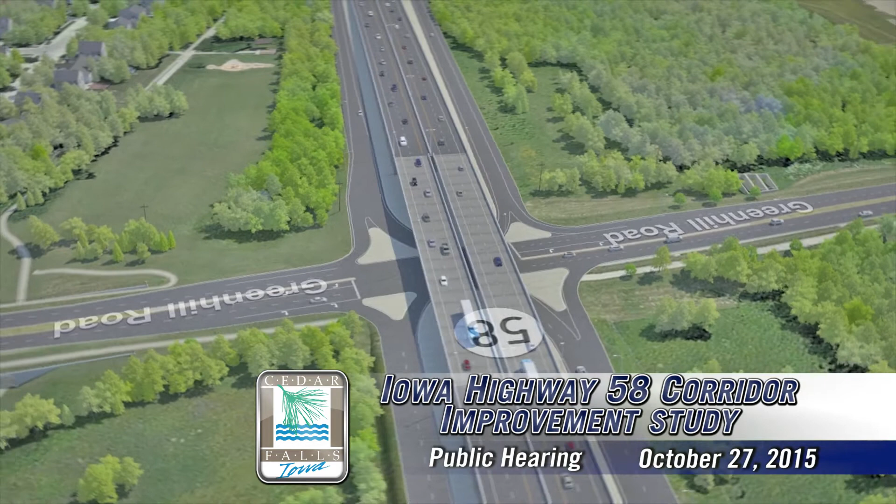In just a minute, Larry Wheely with AECOM is going to go through a formal presentation. He said 20 minutes, maybe 25, 30 minutes, depending on how long he wants to go. And then after that, we will take questions. So we'll hold off on questions and responses until then. And when you do come up, please keep your comments as close to 3 minutes as you can. We have a lot of people here tonight. Again, we appreciate you being here. And Larry, I'll turn it over to you.

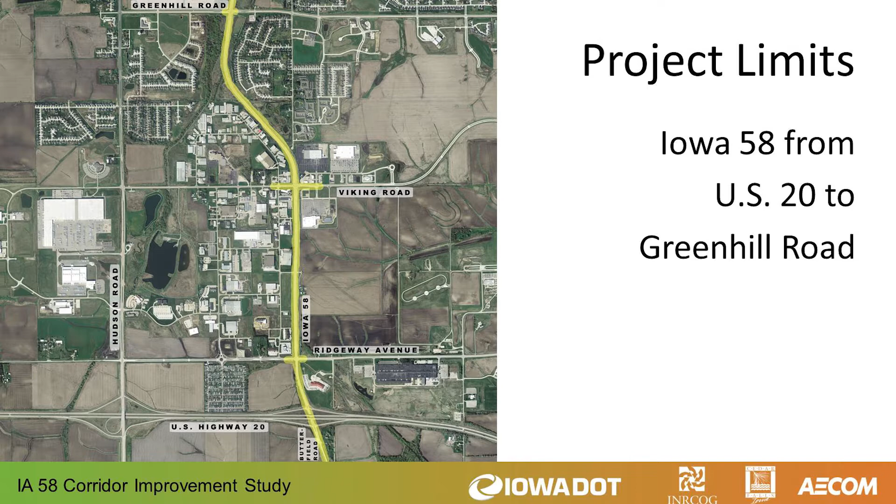Just for your information, the project limit is on Iowa 58 from US 20 up to Greenhill Road, and then just a little bit beyond Greenhill Road where the ramps tie back in to 58. The purpose and need statement is kind of the guiding factor that we look at when we're evaluating alternatives and making decisions on the project. We want to know that what we do meets the purpose and the need for the project. For this project, that purpose is to increase the safety for vehicles, pedestrians, and bicyclists, to improve the flow of traffic, and to provide adequate capacity to accommodate future traffic growth in the corridor. So that statement is what the alternatives were evaluated against to make sure that we met those criteria.

We talk about the need for action. I think we're all aware of the safety issues that are out there on Iowa 58. This study, which has been going on for about 2 years now, looked at accidents between 2008 and 2012. In that time frame, there were 168 crashes, 35 injuries, and unfortunately 2 fatalities. And we know that outside of that 5-year window, there have been, I think, 3 other fatalities in the corridor. So we know it's a dangerous area. That crash rate is about 40% higher than the statewide average for that type of area.

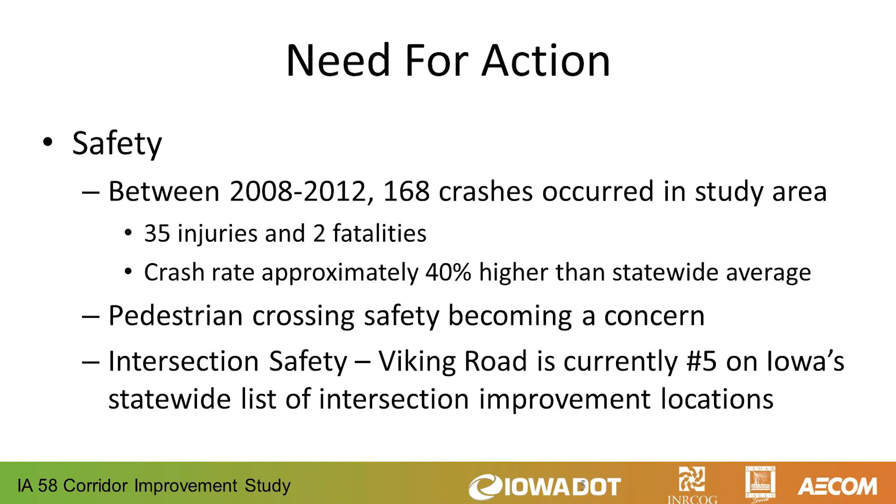Pedestrian crossing is definitely becoming a concern. You've got restaurants on one side of the highway and hotels on the other side. That's a concern; we want to make sure that we can safely accommodate pedestrians. And just as a matter of information, the DOT classifies intersections, and Viking Road is the 5th most dangerous in the state according to their criteria. So it's something that is definitely in need of changes.

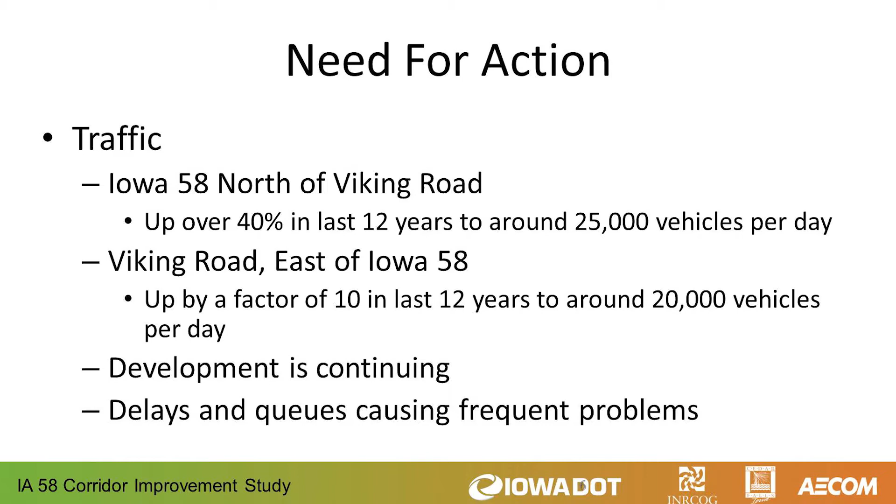Traffic on 58, we know it's increasing quite a bit, 40% in the last 12 years. Viking Road east of 58, this is a number that is just really surprising. It's gone up by a factor of 10 in 12 years. And we all know why. We just had Blain's out there 12 or 15 years ago, and now we've got Walmart, Target, Menards, McDonald's, the list goes on, and it's continuing to grow out there. And delays and queues at all of the intersections out there continue to be a problem.

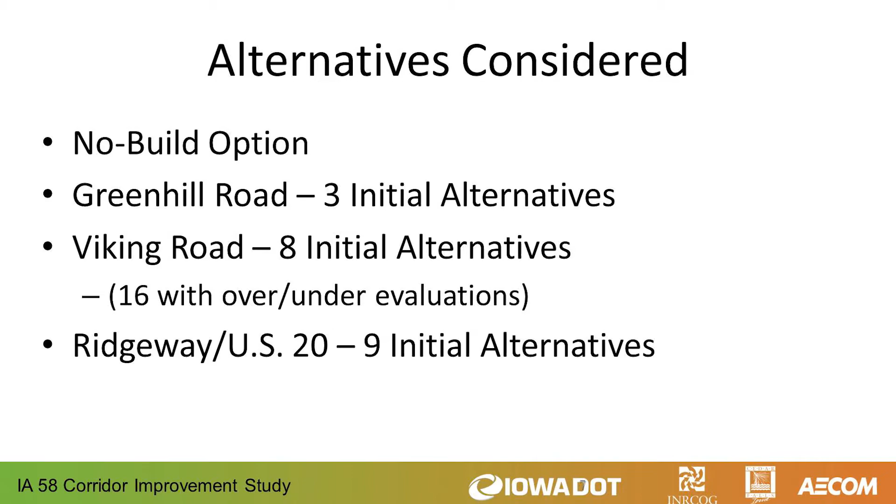We did look at many options in the corridor. First, we look at what happens if we don't do anything. That's one of the options that's considered. For the other intersections, we did look at a number of different options, and I've just kind of thrown them up there. I know you can't see them all.

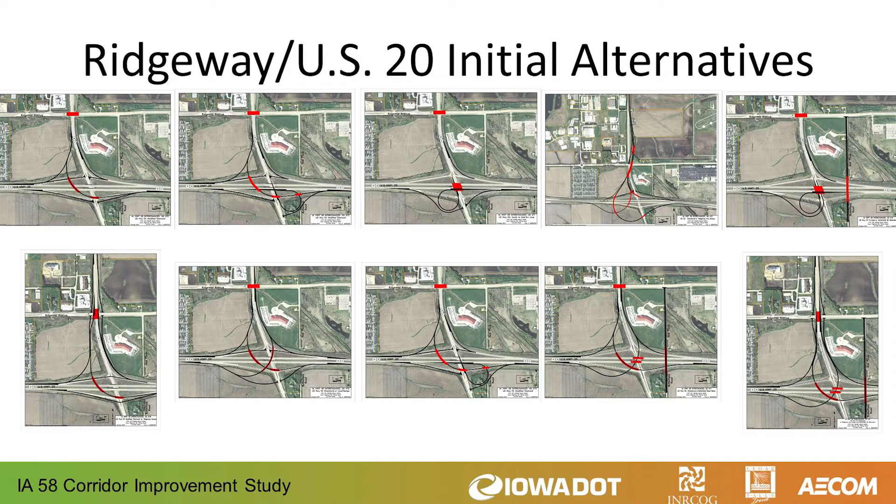We've looked at different interchange configurations at 20. Some of these had Ridgeway connected, some of them did not. Some of them relocated Butterfield Road, some of them did not. We looked at many different options in that area.

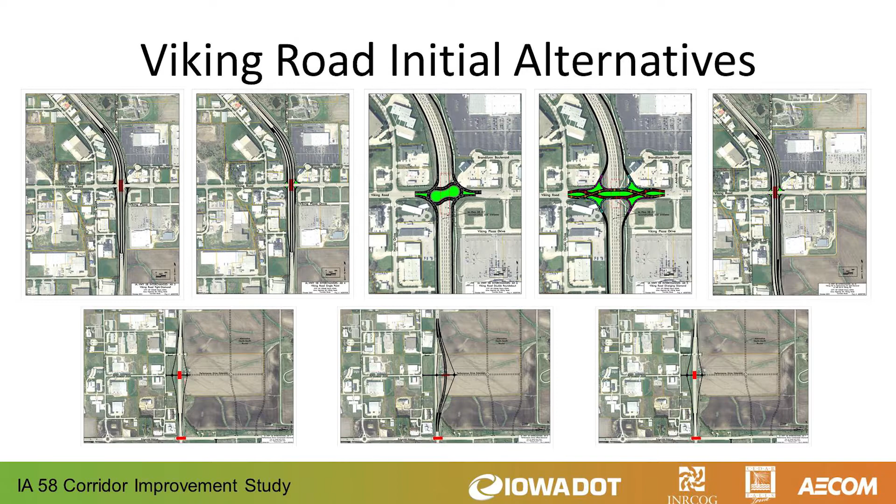At Viking Road, we did look at 4 or 5 different interchange types there. We looked at moving the interchange south towards Shawnee rather than having it at Viking Road, just to see if combining Ridgeway Avenue and the Viking Road interchange in one location would work. Looked at many different things in that area.

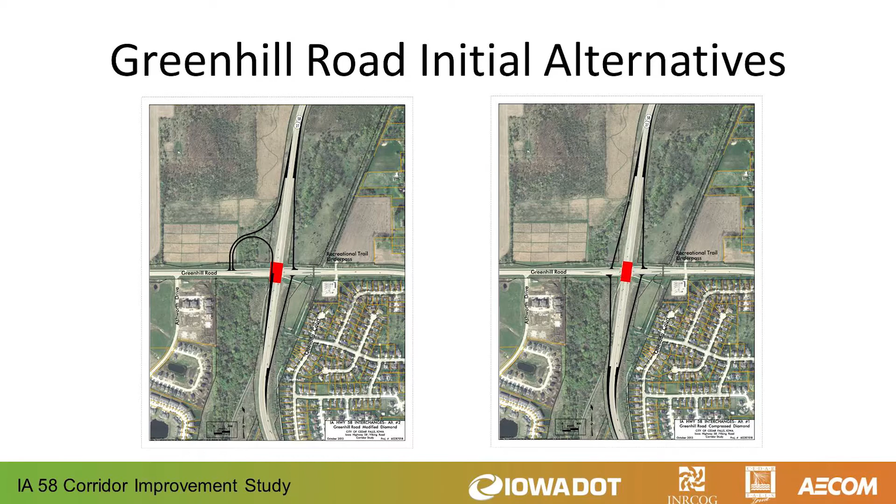At Greenhill Road, we're a little more constrained because of the wetlands and because of the detention basin. Looked at two basic options there, one with a loop and one without a loop in that location.

To look at those preferred alternatives, we kind of went through an initial screening process. We looked at traffic operations, which would work better, environmental impacts. If there was one that impacted more environmentally than the other, then we took the one forward that had the least impact. How much property was needed for the project, and then costs came into play. Some of the options are obviously going to have different costs. Took all of those to come to where we had a preferred alternative. And we'll go through these preferred alternatives now.

The system interchange at US 20 and Ridgeway, a system interchange would be similar to what happens at 380 and 20 over in Waterloo, where the through traffic doesn't need to stop at any of the movements. Butterfield Road remains connected, and then Ridgeway Avenue also remains connected. That was one of the things that we heard very clearly at our last public meeting and in meetings with landowners and businesses in the area, that connection to Ridgeway was an important thing.

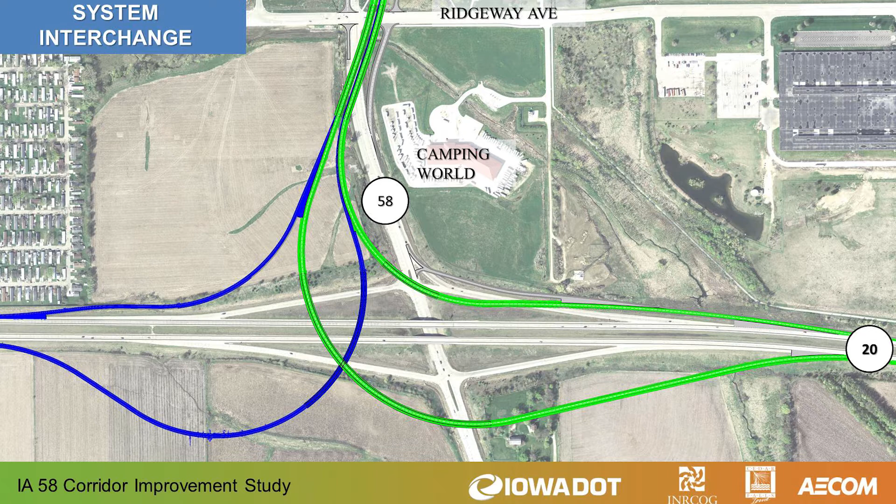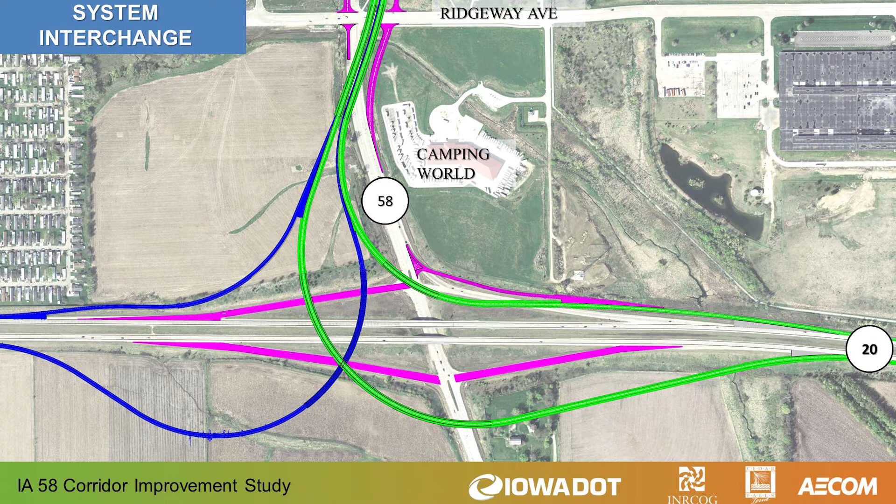I've got just here a graphic that kind of shows that, looking straight down on it in a plan view. The lines in green would show how traffic from 20 to the east would access Iowa 58. They would go over the existing roadway there to tie into 58 going to the north. The blue lines represent traffic from the west or to the west, proceeding to access Iowa 58. And then the purple lines here show that to get to Butterfield Road or Ridgeway Avenue, you essentially use the ramps that are there now to get to the existing 58, which allows you to reach Ridgeway Avenue or Butterfield Road to the south, going down towards Hudson.

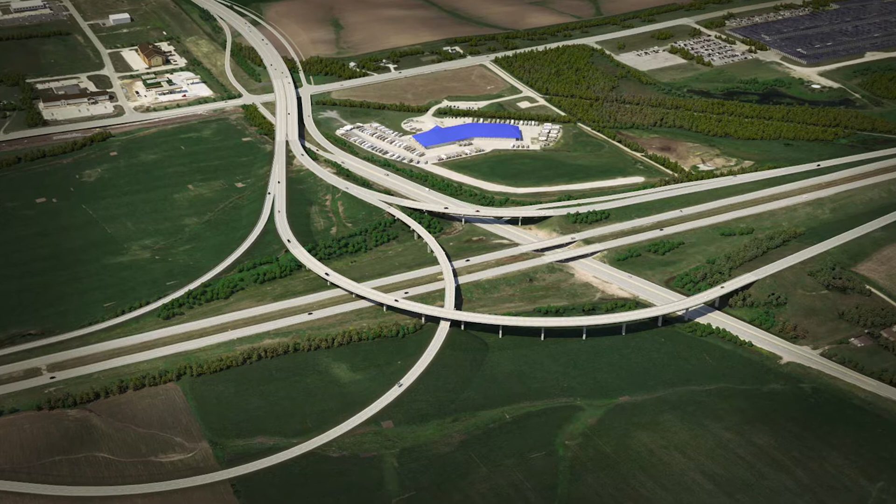This is an artistic rendition of what that might look like in the future. Just showing a large number of ramps on bridges, and how, in particular in this area, 58, rather than going straight to the north here, kind of swings a little bit to the east to allow the ramp connections to Ridgeway to stay there.

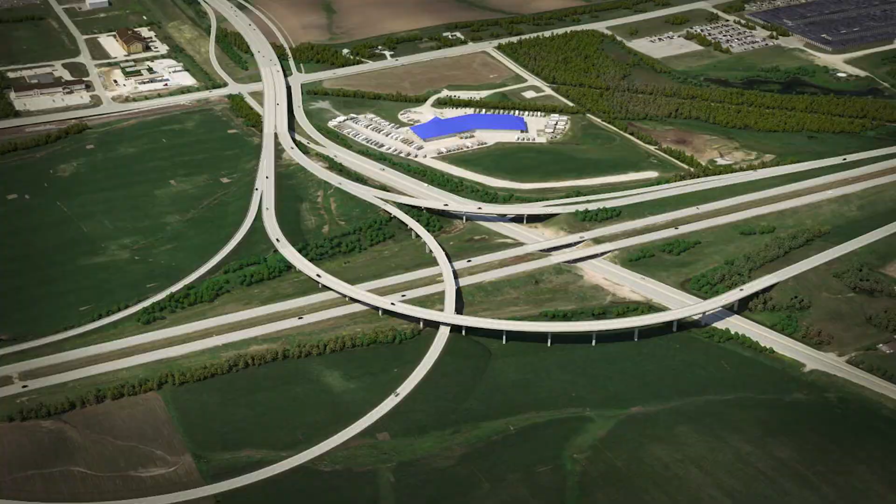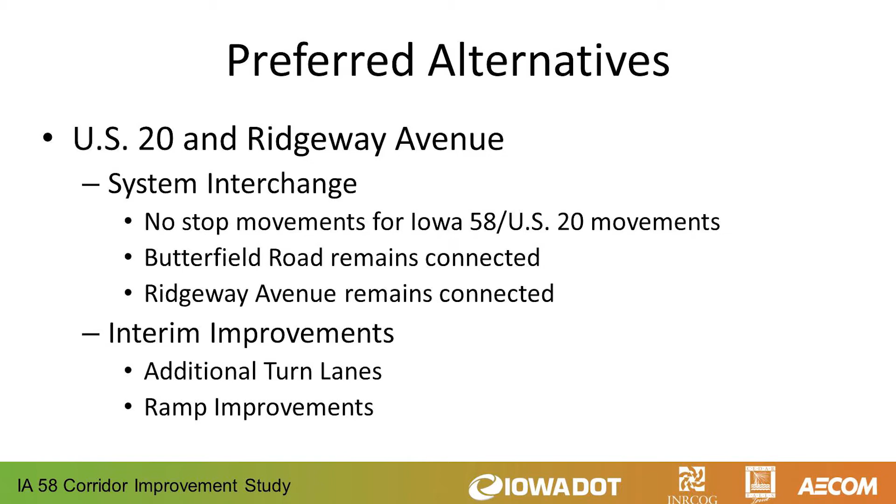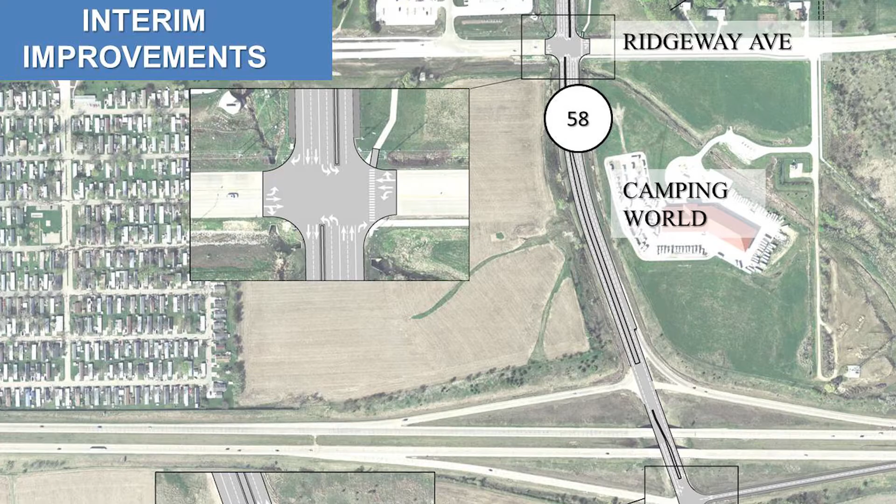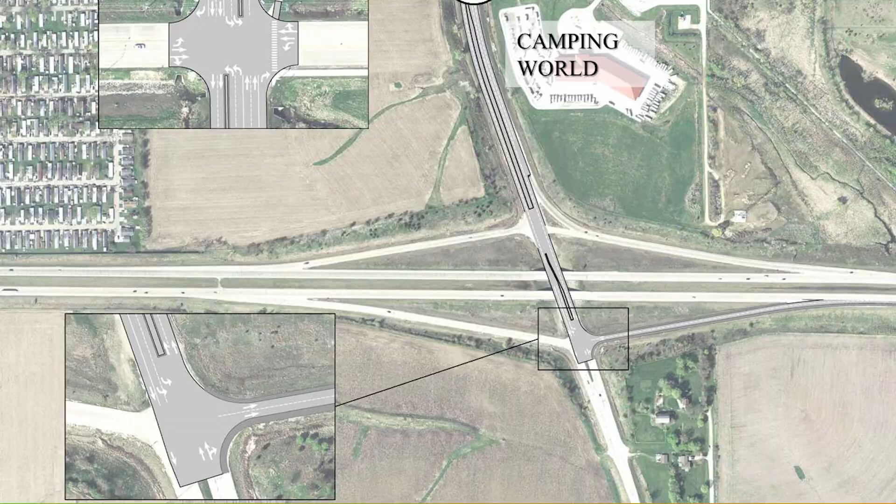Because we know that the system interchange is a long ways off from a funding standpoint and how the process goes, we did look at some interim improvements to the intersection, and those would include at the intersection of Ridgeway and 58, adding some double left turn lanes, and then at the ramp from the southbound 58 to eastbound 20, adding a double left turn there and a 2-lane ramp. And that bides time until we can make the full system interchange at that location.

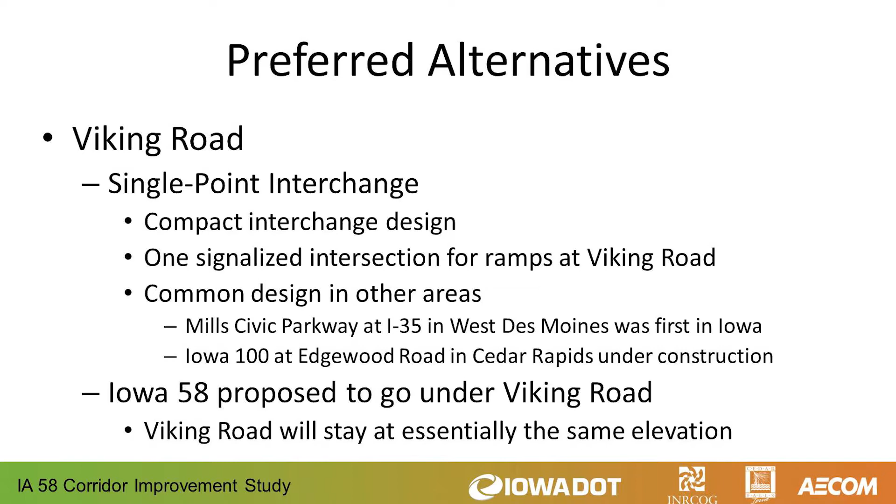At Viking Road, the single point interchange was selected as the preferred alternative. This is a very small, compact design. It basically takes one signalized intersection for the ramps. This is a common design. I know there's several in Minneapolis that are that style of interchange. In Iowa, I know that the Mills Civic Parkway at I-35 was the first in the state, and right now Cedar Rapids is building one at Iowa 100 and Edgewood Road. So it's not an unknown type of interchange. It's something that is known in the state and around the country.

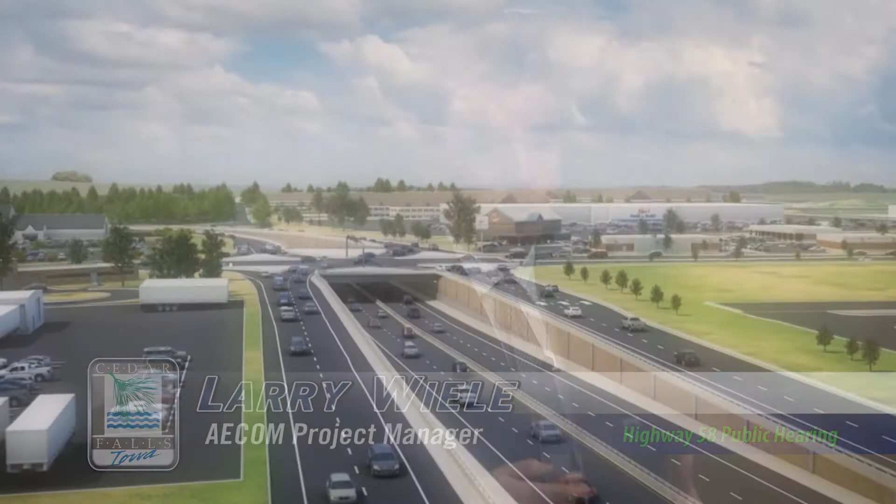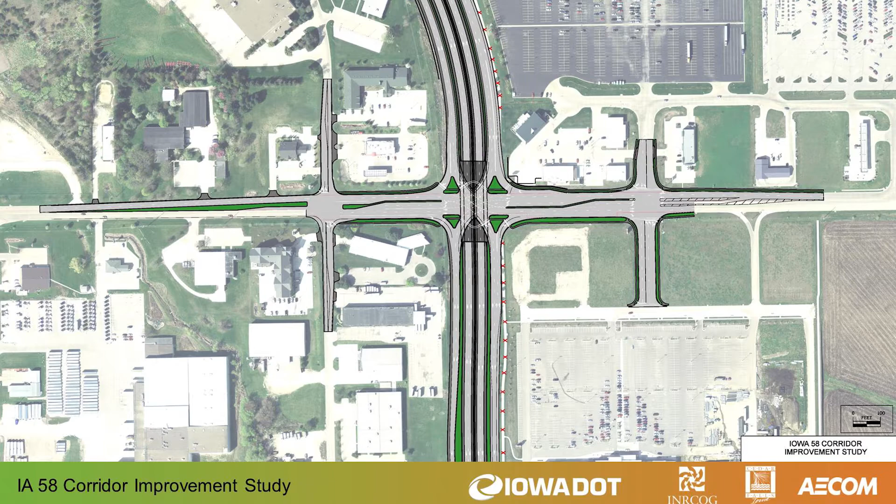Right now, one of the things that we've heard, again, loud and clear through our previous meetings, is that the preference was for Iowa 58 to go under Viking Road. From an aesthetic standpoint, people felt that was a better option. So Viking Road is essentially going to stay at its same elevation. This is just, again, an aerial view. This is 58 going to the north, Blain's, Walmart, and Target, showing the ramps that all meet at a single intersection right there at the center of the interchange.

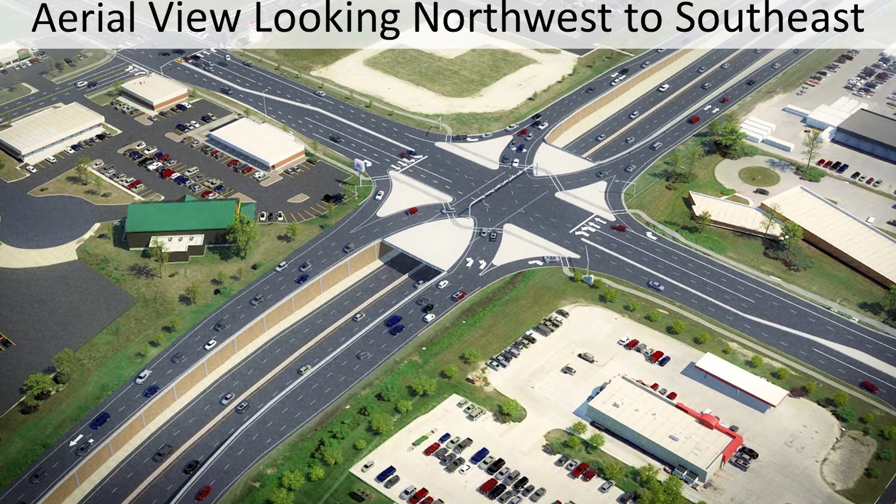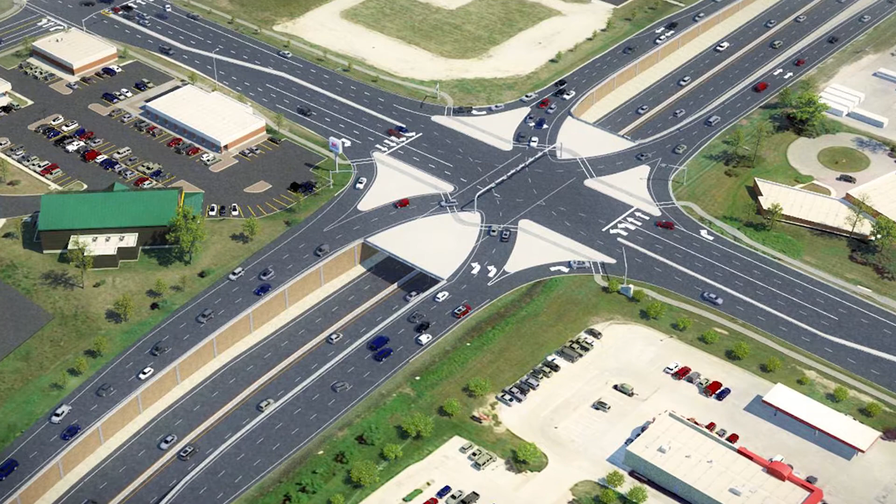This is a similar graphic that was in the paper last week. Probably most of you've seen it, showing how the traffic from the ramps would make a left turn at this one signalized intersection, and traffic from the south would make that same movement there. This is kind of a driver's eye view of how it would look if you were coming from Cedar Falls and heading to Target, heading to Walmart. This would be your vantage point there.

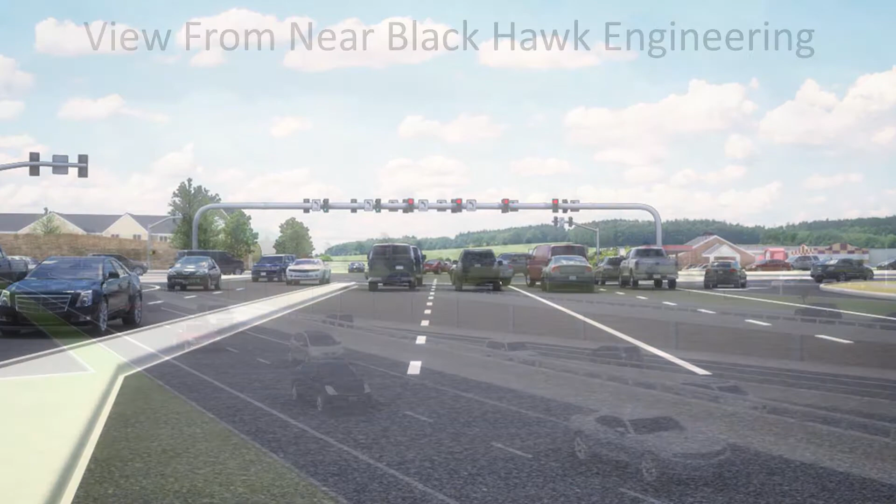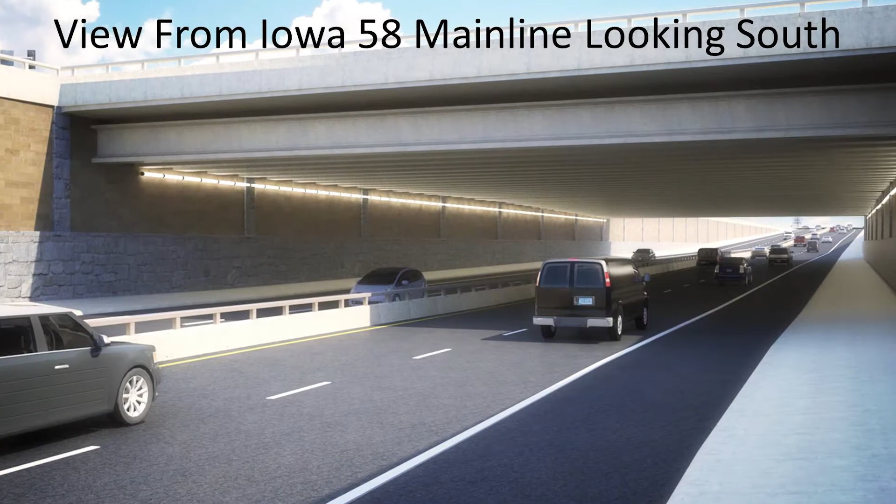This is just a view from near Black Hawk Engineering where you can see the roadway and how it dives down between two retaining walls to go under Viking Road. And this is just closer there where it goes underneath the Viking Road Bridge and takes the mainline traffic under there. This next video, this was running beforehand. I had several pictures and videos going beforehand.

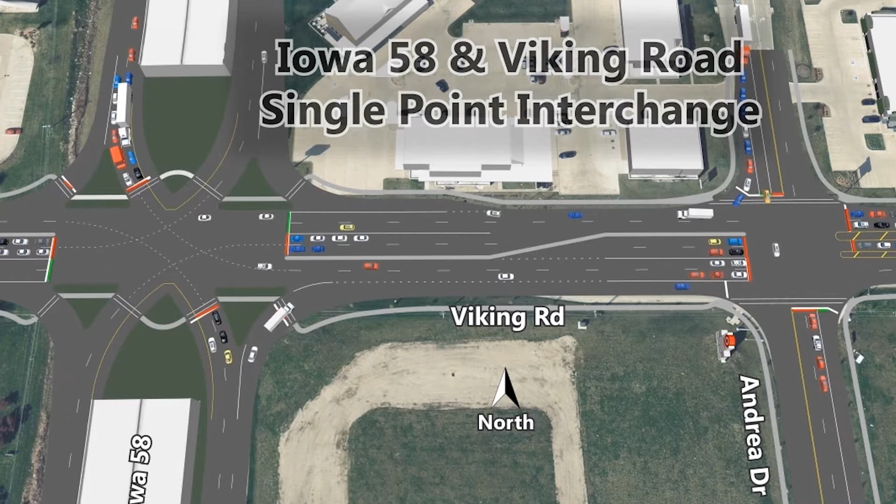This video just helps to show how the traffic operates at a single point interchange. This is the single point interchange here with Highway 58. And the first thing that will show up in the purple lines there is the left turns from Highway 58 from the ramps onto Viking Road. Those would be double left turns that would operate at the same time. The next movement that would happen then would be the left turns from Viking Road to get onto those ramps.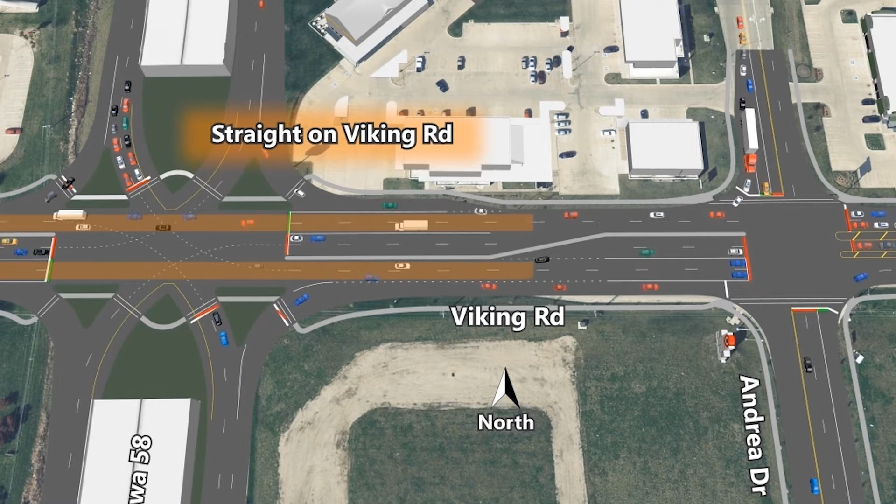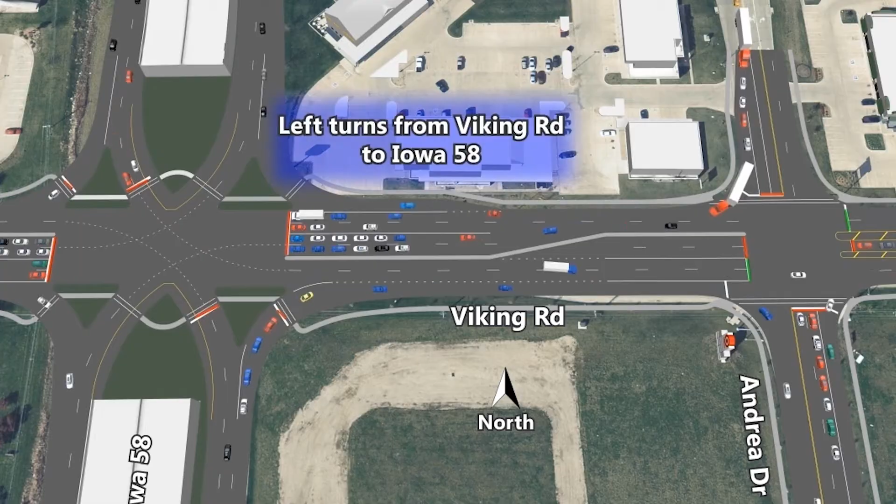And then the third part of that would be if you're going straight on Viking Road to go from the shopping to industrial park or vice versa going back. And I just point out that the hope is to interconnect the signals with Andrea so that the timing between the intersections works together and prevents a two-stop system, so that you can go through on green.

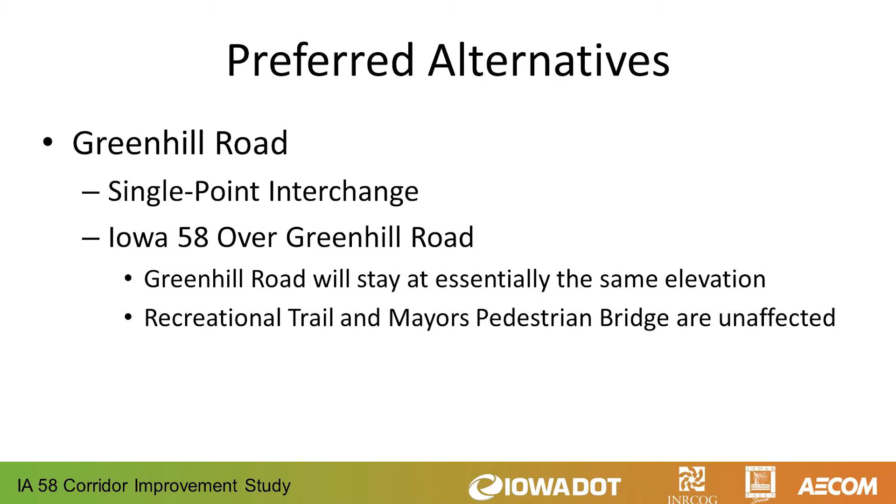At Greenhill Road, it would be, again, a single point interchange to try to compress the amount of land that's taken for that. It'd be similar to Viking Road, except that in this case, Iowa 58 would need to go over Greenhill Road. Greenhill would stay at essentially the same elevation. The main reason for that is because of the environmental constraints in the area. There's wetlands that would be more impacted by taking Iowa 58 under, which would essentially be Greenhill over, and there would be more retaining walls needed for it. So it's an environmental issue and a cost issue on that.

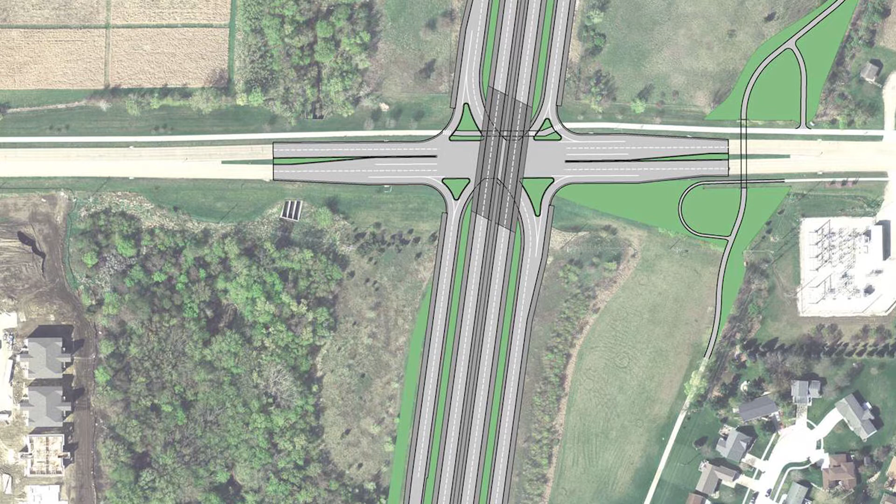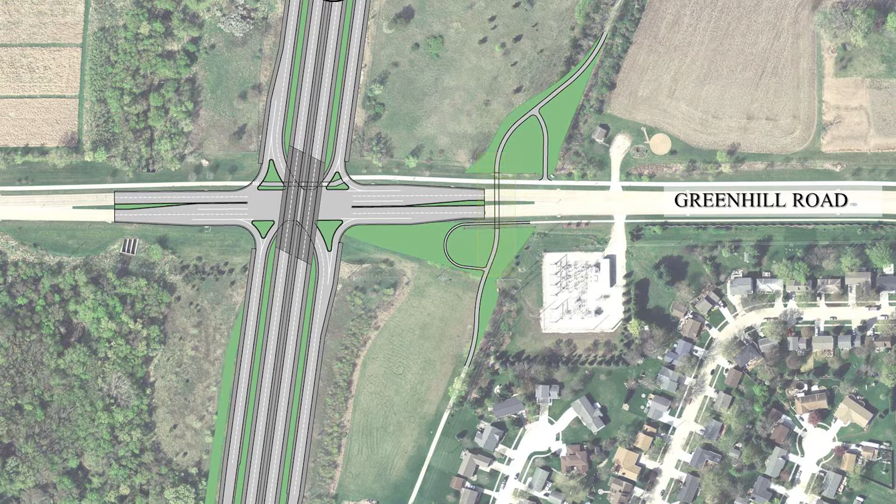And just a note there that the trail bridge and tunnel that was just constructed a few years ago would not be impacted by that design. And just to show you from the air again, this is the detention basin that we were talking about that we can't fill in. We're trying to minimize that impact, and that's also the area where some of the wetlands are. This is the tunnel under Greenhill, and this would be about the end of where Greenhill would need to be changed there.

Again, just an artistic rendition of that. The low area here by Dry Run Creek, the tunnel coming through here, and then showing the bridge going over Greenhill Road.

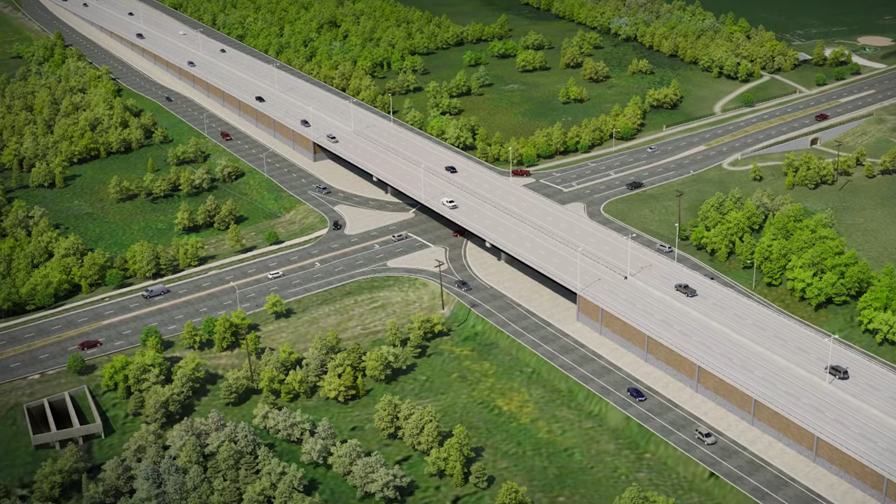As part of the environmental assessment, we take these preferred alternatives and we evaluate them based on a number of factors. Socioeconomic could include the land use, how it affects the parks and the recreational facilities, how much property is required, and then what happens during construction, and how does it affect emergency routes for police, fire, and ambulance. Cultural impacts could include historical, archaeological sites. That's something that we've studied. Your natural resources, the wetlands, how it affects floodplains, floodways, and then how much farmland does it impact.

Physical impacts would include noise and how much the noise is impacted by the project. And then visual impacts is, fairly obvious, how it looks to the public after construction. Just some key findings. I know the EA, we have copies here if you want to look at it, and it's been available online for you to review as well. These are just some of the key findings.

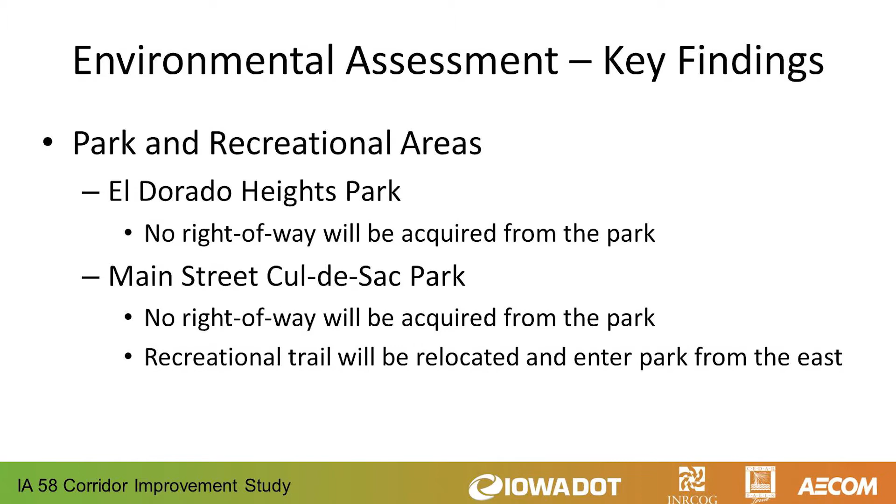For the park and recreational areas, El Dorado Heights Park, there's no need for any property to be acquired from the park. It stays essentially the same. At the end of South Main Street, that cul-de-sac is actually a park. It's got the shelter there. No right-of-way is needed from that park. However, the recreational trail there will be reconfigured to reconnect to the existing trail.

One of the main reasons for that relocation being needed is the desire to take the through recreational trail traffic and move it out of the interchange. It's a dangerous spot for pedestrians and recreational users, so we want to take as much of that, we'll call it through traffic, away from the interchange, and we've given them a route around the facility.

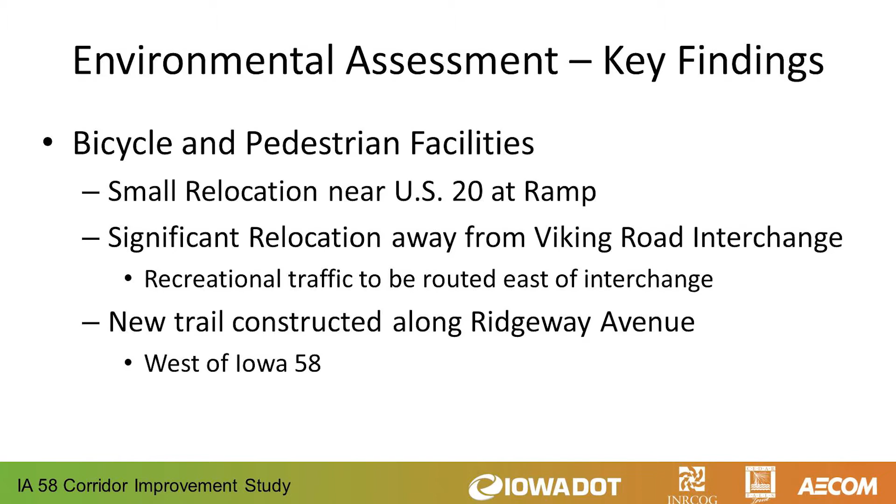There will also be a little bit of relocation near US 20 on the ramp, and then a new connection between Ridgeway and the existing trail along Nordic to connect over towards the Prairie Lakes area.

Right-of-way: one of the things that we've tried hard to do with this project is to not have any total acquisitions. We've been able to narrow down the right-of-way so that no buildings are impacted, and it's just a matter of taking some strip right-of-way along some of the properties, and where 58's been relocated, we've been able to do that in areas where buildings aren't affected.

We did find in our study that there was one historical site, the Butterfield Barn, which is the one you can see just south and east of the 20 and 58 intersection right now. And when we found out that that was an eligible barn, we were able to adjust the design to move away from that and

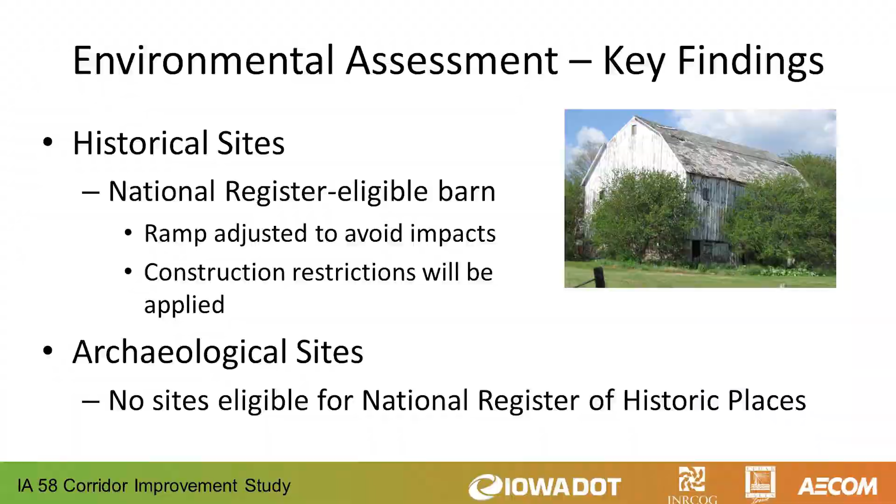not impact it directly. But even at that, the Historic Preservation Office put some restrictions on us that we would need to monitor during construction to make sure that no vibration and no damage occurred to the building. And there were no significant archaeological sites that were found during our study.

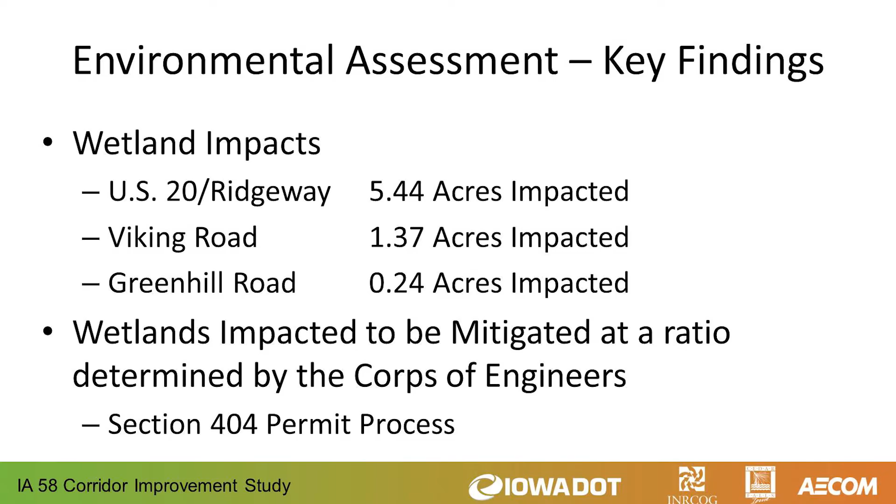Wetland impacts, we did find, as you see, there's some wetlands in the area. These are estimates based on our preliminary design. As we go through final design, we'll refine those numbers and then go through a permit process with the Corps of Engineers. They require us to mitigate any wetlands that are impacted, and those will be mitigated through that permitting process that we go through with the Corps of Engineers.

Noise impacts. The DOT noise policy says that noise abatement must be considered if traffic noise impacts are identified, and they have some criteria for that. It needs to be feasible, and they have in their policy that that's a 5 decibel noise reduction, that if you build a wall, you need to provide that 5 decibel reduction. And then it also needs to be reasonable. And that's $40,000 is what they consider reasonable for an individual property.

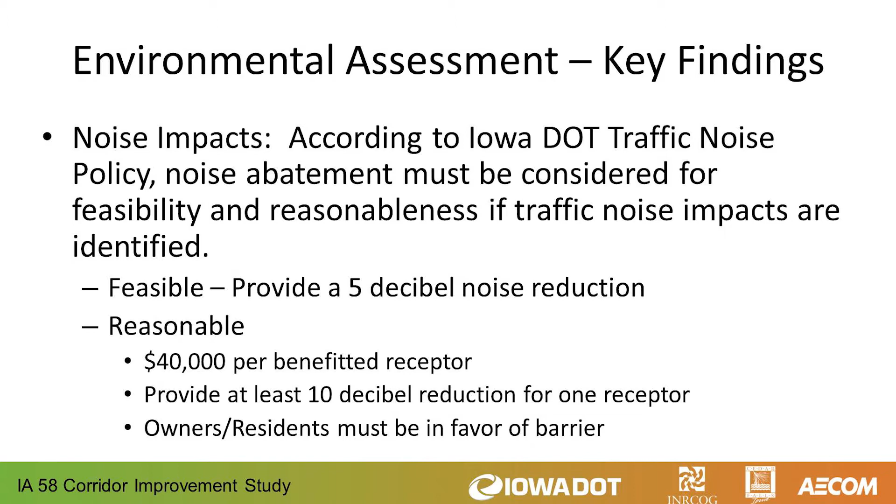And then it has to provide at least 10 decibels for one of those properties that is given that protection. And then also they need all the residents and neighbors to be in favor of that. There's pluses to the noise barrier. It reduces noise. There's negatives. It's a big wall maybe in your backyard, and some residents may be opposed to that.

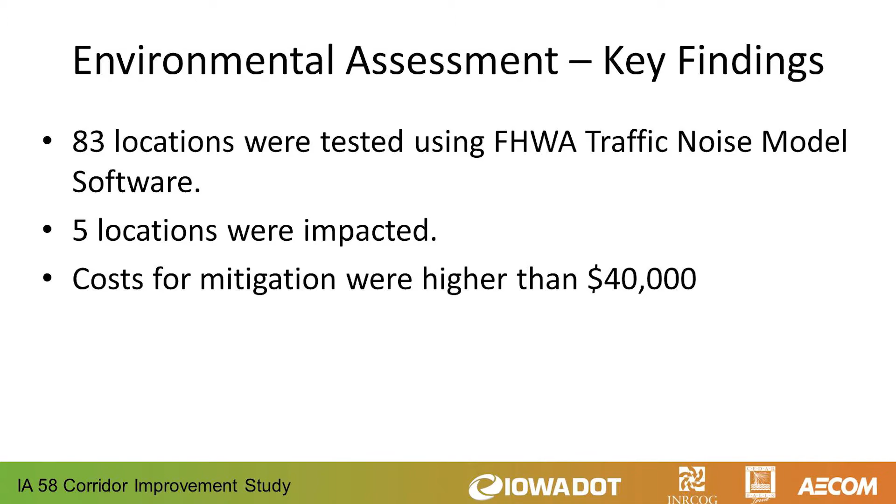In our study, we looked at 83 locations that we tested using the traffic noise model. That's the accepted method of doing that according to the Federal Highway Administration. We did find that 5 locations were impacted. However, we did find that the costs for mitigation were higher than that $40,000 threshold. So the noise abatement measures aren't eligible for the federal and state funding for that.

So we go through the study and come to the conclusion. We did find that the proposed project is necessary for safe and efficient travel within the corridor. Going back to that purpose and need statement, to improve the safety of the corridor and to allow for the traffic to move. We also found that there were no significant adverse social, economic, or environmental impacts.

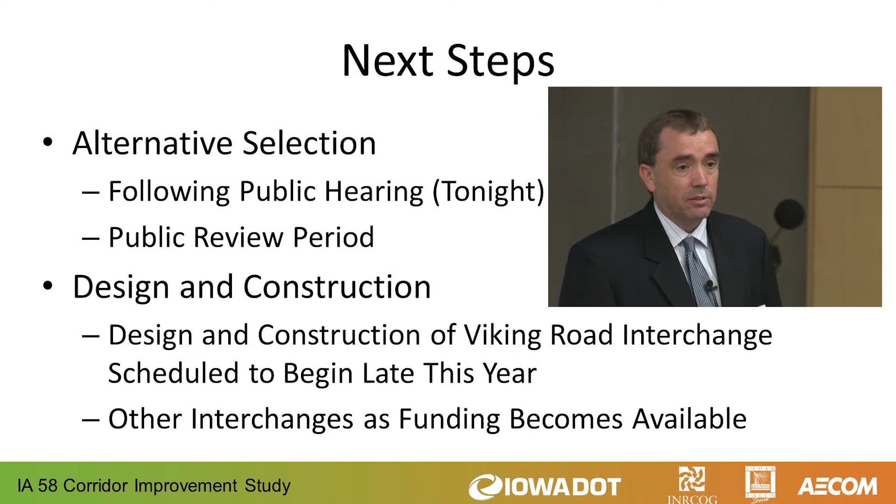So our next steps. Our next step is to go through an alternative selection. That hasn't happened yet. We've called these preferred alternatives. Those are the ones that we think are probably going to be the ones that move forward. They're preferred. That decision hasn't been made yet. This hearing tonight is one of the steps in that process that we need to have comments from the public. This public review period started when we sent the documents to the agencies and scheduled the public hearing.

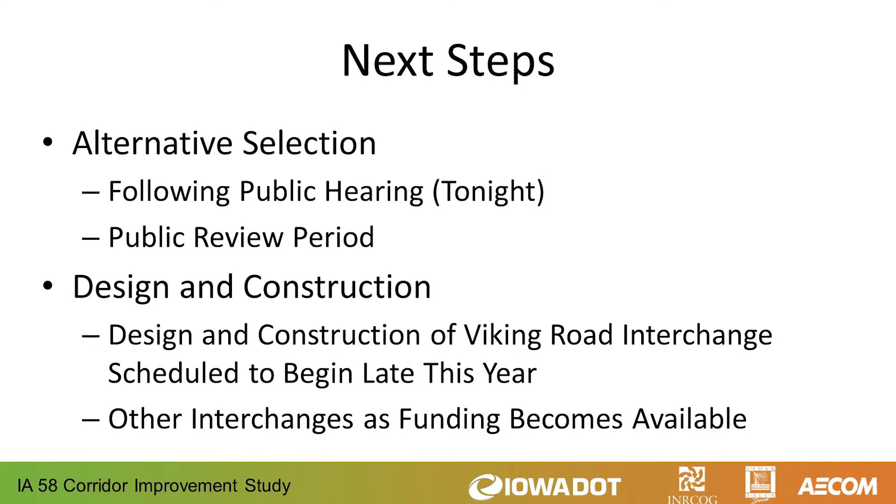Design and construction. Right now, once the environmental approval is received, there is funding available to start the design and construction of the Viking Road interchange. Design will start probably in the December, January timeframe, really as soon as we go through the process. The other interchanges, right now there's no money funded for those, but as that funding becomes available, then we would move into the design and construction of those.

So the comments that we'd like from you. When you all came in tonight, hopefully you picked up one of the pamphlets. The last page of that is a comment form. Any comments that you provide us on that form end up going into the official transcript of this hearing and become part of the decision-making document that the DOT and the Federal Highway Administration go through in approving the project or issuing changes to it. So that's an important thing, is to make those written comments. Those will go into that transcript.

There's a box in the back that you can put those in. Feel free, if you want to think about it, to write out those comments at home. That's fine. Mail those in, or you can scan them and email them in. That's great. We do ask those to be turned in by November 12th. I think that's about 2.5 weeks out, giving you time to do that.

There's also a time for public comments, and that's kind of why we're here, to get those public comments. We do ask a few things out of consideration. We do have lots of people here tonight, and there's probably several that want to make comments. I know that many of you signed up to talk when you came in. I ask that you please use the microphone. That allows people to hear you. Don't be nervous. There are cameras over there, but they'll be kind to you, I'm sure.